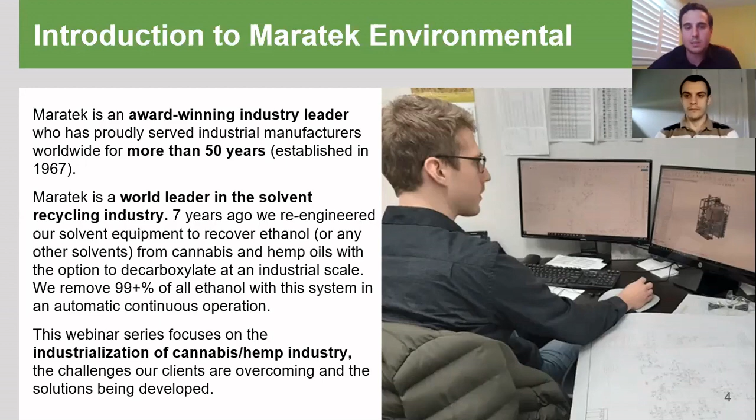And with our initial entry into this industry, it really was around solvent recycling and recovering the solvent out of the oil. And that really led to the development of our ORES series, where we didn't just recover the ethanol out of the oil, but we automated the 3 steps of bulk recovery, residual recovery, and decarboxylation all within one system. And we'll dive into that and some of our technologies a little bit later in this webinar.

So now to jump right into the webinar process. So on that, a high-level overview of the cannabis and hemp oil production process. Well, the first step is the inbound biomass. You've got to be thinking also about how that biomass is being received. Is it super sacks? Is it in barrels? Is it wet and it needs to now be dried? Is it already pre-ground? How are we going to be unloading it and bringing it into the plant? And that's really the main focus, the main entry point of the production process. From there, we get into extraction.

Now, on the extraction side, there's a few different types of solutions regarding the technologies that can be used, but the main two right now in the industry, we would say, would be ethanol extraction and CO2 extraction. There's also butane extraction, other hydrocarbon extraction, rosin presses, water-based extraction methods. But CO2 and ethanol are kind of the main two right now in the production process.

From there, we get into filtration, which is really two steps on the filtration side. The first step there being filtering out the plant material after the extraction step. But also, depending on the type of extraction method that you do, you might be carrying on a lot of fats, waxes, lipids within the oil. So you might need to do a whole filtration and possibly even winterization step to pull those out of the oil. From there, we get into the recovery stage and decarboxylation stage.

Now here, what we're talking about in the recovery and decarb stage is basically the three steps of bulk recovery, where initially a lot of people at smaller scale just use rotovaps, but as they scale, they look at other lab technologies like falling film evaporators for the bulk recovery stage. From there, possibly going into a rotovap or another system for the residual recovery for the little bits of ethanol that are left over after the falling film system. And then the decarboxylation step, which is activating the cannabinoids within the oil.

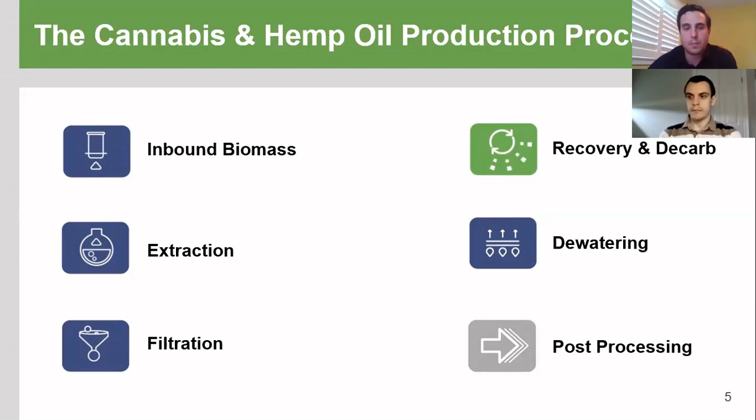And from there, we go into post-processing, where we would talk about doing distillate production, isolate production, or whatever other final process you'd like to do, depending on what your final product would be. So to start things off, the importance of automation and closed looping. So the question really is, why automate and why closed loop?

Next slide. And here what we've done is given you a general high-level overview of that extraction process. So here we're referring mostly to a cryoethanol extraction process. You have your biomass feed in. Then from there, you have your extraction step, either CO2 or ethanol. The winterization step's optional. When doing CO2, you end up carrying over a lot of those fats and waxes that I was referring to, where you would winterize to freeze them out.

Just like when you put, for example, your soup in a fridge overnight, and you collect that fat layer at the top. So to winterize your solution, you basically pull out the fats and waxes thereafter with the filtration step, whereas doing a cryoethanol extraction process, you could completely skip the winterization step, as you wouldn't be pulling all those other things out of the plant into your oil.

From there, then we'd go into your bulk recovery step, your residual recovery step, and decarboxylation. And this is where our Maratek Ores 3-in-1 solution really can take those three steps. So rather than using a falling film, then a rotovap and a decarb reactor, automating all those three steps within one solution to a heated oil storage.

And then you see there at the bottom, from a closed loop process, you would bring your ethanol back over to your cryo chillers first, and then feeding into your extractors in a closed loop process. And if you are carrying over water too, in that stage is where you'd close loop into what we consider our F series, or another system could be used as well to reproof your ethanol in line.

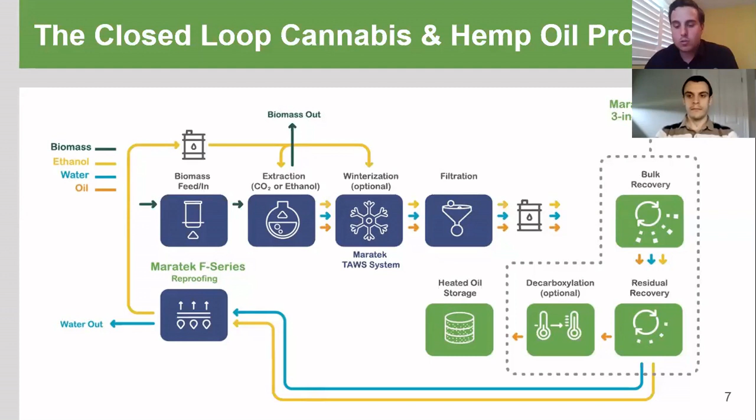Now, the big thing is, why automate? Why closed loop? Well, the cannabis and hemp industry come from a gray and black market. And back in those days, having a 10 or 20 liter rotovap would make you the biggest guy in the province or the state. But when scaling your operation, be it to just a few hundred pounds a day or a few thousand pounds a day, you really got to think about the efficiencies that are really going to come into play from closed looping and automating this process.

It'll also especially help with one area where we see a lot of losses among our clients, which is ethanol losses. When you're dealing with open containers of ethanol, two things: one, you have the ethanol evaporating continuously, but also two, ethanol is hygroscopic. So it's absorbing the moisture out of the air, and your ethanol grade is actually going to be decreasing just from having open containers. You're also going to have increased ethanol allowances.

A lot of issues that the industry is running into as they're looking to scale is increased regulations for having more solvents on site. One way to help avoid some of those things is by closed looping the process. That way you can have more ethanol on site and not necessarily have to deal with building full C1D1 environments. Also, reducing your environmental footprint. A big thing is, well, solvents are not the most environmentally friendly substances. So any chance you can to reduce that, we're a green industry after all. So that's a big step.

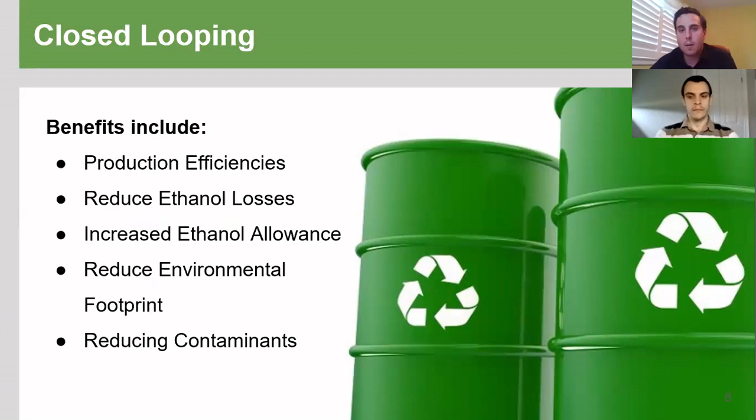But then it really comes into, on the next side, reducing contaminants. During these extraction processes, we're seeing a lot more of the industry pushing more and more towards GMP compliance, towards pharma, right? Whenever you have an operator dealing with the substance and carrying it around or anything of the sort, there's always an opportunity for operator error. So by automating and closed looping a process, you greatly see a reduction of those issues, and also of contaminations, just from even having your oil in an open container, you can get contaminants that way.

But you also see further benefits from reducing labor costs, because now instead of having a room full of falling film systems and rotovaps and different extraction units and so forth, by closed looping and automating that process, you streamline that efficient process, and you can take your existing team and scale and achieve a lot more production value using your existing labor. And it's really evolving the mindset from thinking about the production process as all these small individual systems into a single process, a single control system for an entire production process.

And then the other big advantage, for GMP and especially EU GMP, is all that batch tracking capability that's brought along with the whole automated step. So you can control every single step along the way, with controlled tracking for every different batch you do, be it time of day and everything like that. So if you ever had to deal with a recall or anything of the sort, it makes it very easy for your team to handle. And really, at the end of the day, it's not us pushing the industry that way. It's really our clients that are driving us to continue the developments on this side.

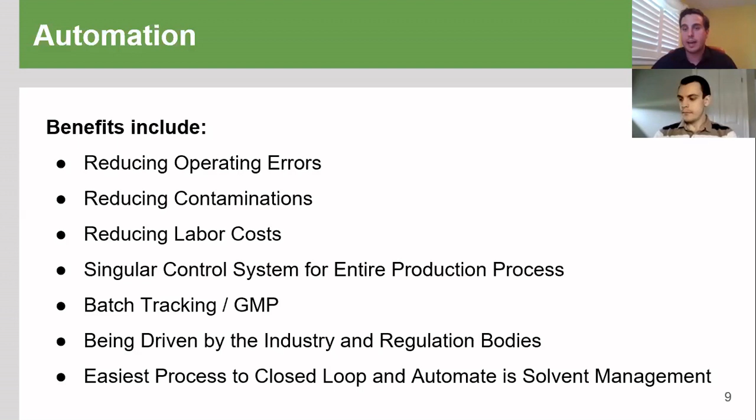And for those of you that are already running an existing operation and going, well, I've already got all these systems. What do I do now? How can I look to make my existing process more efficient, even though I'm running with all these individualized systems? The easiest first step to close loop and help automate your production process and achieve much more production of what you already have is regarding solvent management.

So next slide. So here on that side, just to recap back to the previous closed loop system that we were talking about, even if your biomass feed in, your extraction step, your winterization, your filtration step are all being manually done, you could already look at automating that whole recovery step at the end of the line there, your downstream technology of bulk recovery, residual, and decarbing into one system with our ORA solution, but also then close looping that right back to your cryoethanol storage to be rechilled and then refed directly back into your extractors.

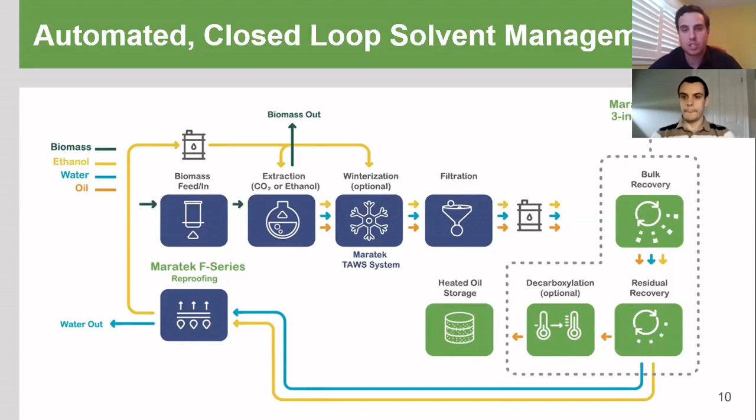So that's what we see as kind of the lowest hanging fruit for existing operations to jump to that next level from an automation and closed loop production standpoint. So now I'm going to be handing it off to my colleague, Lucas, who will be taking it on now regarding the implications of scaling, some more about the advantages as well as some of the challenges.

All right, great. Thanks, Kyle. So as you mentioned earlier, I'm a senior process and automation engineer at Maratek. And the four things I want to touch on today are major things you want to think about looking at scaling up your cannabis or hemp extraction project. So the first would be process design integration. So this would be the discipline where we lay out the equipment in your process, connect it together, and make it all work together as one continuous system.

The next is regulatory and jurisdictional issues. So dealing with ethanol and other hydrocarbons puts you in a hazardous chemical process, which calls in a lot of regulations and oversight that you have to make sure you're totally compliant with to operate. Then we go into a little bit of chemical engineering, which is dealing with the actual physical and science challenges of scaling up each step. And then finally, we get to financial risks, which ties into project management and some of the pitfalls that you can fall into trying to execute a larger engineering project.

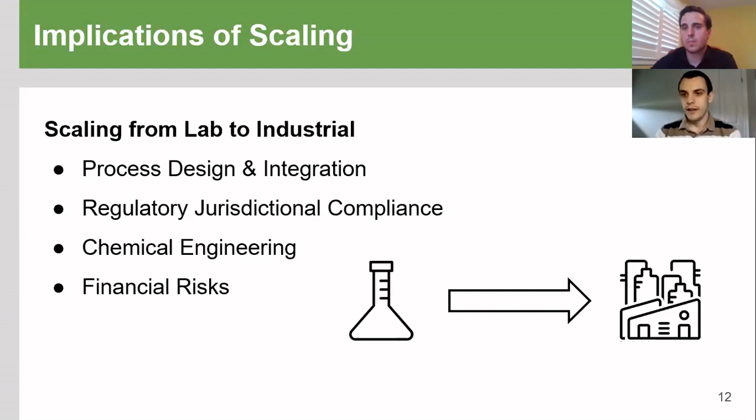So first, in process design and integration, at a small scale, you can think of each piece of equipment as its own discrete thing. You shop around for a rotovap, shop around for a freezer and glassware, and you can place it all in one room, and you don't necessarily have to worry too much about how they're going to work together, because most of the time at a very small scale, it's manual transfer by a worker between steps. It could be somebody literally carrying a glass beaker and putting it in a freezer.

But when you scale up, the material handling by personnel becomes completely unfeasible. Even at a couple 100 pounds a day of biomass in, you're going to need to design hard pipe connections between machines, which could be sanitary GMP connections. And that also brings in, you may need holding tanks or buffer tanks between machines, pumps, valves. Those tanks would need levels. And all of this, very quickly, would force a basic level of automation right off the bat.

So for example, if a buffer tank was getting too full, you'd have to have a central control computer or PLC slow down the machine feeding it, or speed up the machine draining it, or if the tank got too full, stop the process. And we can do all that. We could send a remote alarm to an operator on their phone if that happened. But basically, this level of automation you have to do in your integration also has safety benefits.

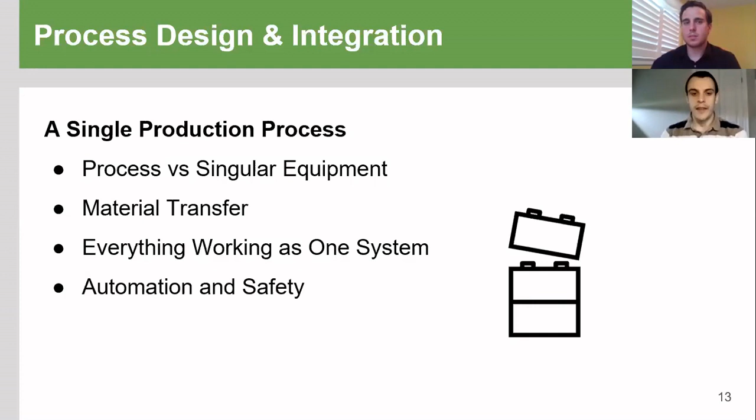You know, a redundant safety PLC would be able to respond to process upsets anywhere in the whole process and safely stop it or control it in a way that wouldn't cause a big problem.

So next, looking at regulatory and jurisdictional issues. So as I mentioned, when you're dealing with hazardous chemical processes, it brings in lots of things like area classification, fire codes, building codes, insurance, and basically your process affects the building you're in, but also it affects society around you at large.

A great example or analogy I use is a small lab might be like playing music on your phone in a public park. While you're not really allowed to play music, you're not really bothering anybody and you're not going to create a big disturbance, so you can get away with that. But scaling up to a large industrial facility would be like bringing in large amplified speakers and inviting hundreds of people. All of a sudden, now you need permits. Now you need to go to the local government. You might not be able to do it exactly where you want and when you want.

The point is, as you disrupt more people and become a bigger interest to society, there's a lot more oversight. Rightfully, I think, if you're dealing with ethanol and hydrocarbons, which, especially as we're boiling them, you could create explosive mixtures in the air with the vapor. So we have engineers in-house that have decades of experience executing hazardous chemical processes. So you can be confident that with the right partners, you can get through this process, but it definitely requires some professional engineering services.

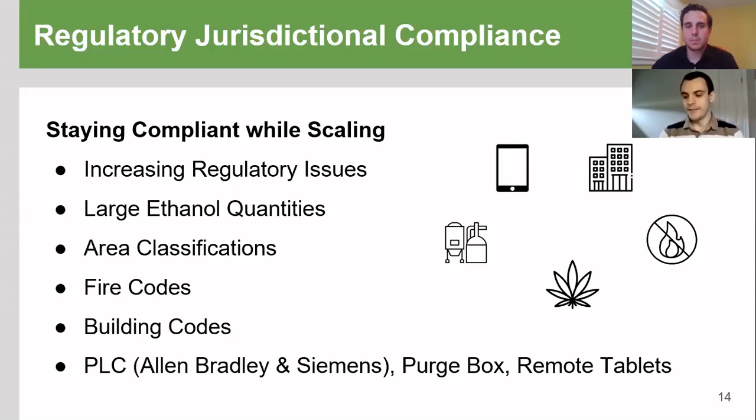And this is all known stuff. None of this is breaking new ground. There's hazardous processes everywhere. These can be executed safely, and you can pass your inspections first round if you know what you're doing. So then I wanted to move on to a little bit more of the chemical engineering challenges. So this gets more down to the science: besides the practical challenge of integrating a process and the regulatory challenge of getting it approved, there's basic physics you need to work with here.

So a perfect example, and this actually comes up a lot, would be the surface area and volume problem, or the square cube law. So we can use the example of a rotovap. You have a round bottom flask submerged in a warm bath, and you're relying on transferring the heat through the surface of the flask into the ethanol inside. So if you just took a rotovap and made it physically 10 times bigger and put 10 times the heating power, it might only be 2 to 3 times faster. That's just because as you make that sphere bigger, you have way more liquid and not that much more surface area. This is just a basic result of geometry.

So there's a lot of engineering and thought that goes into dealing with problems like this. For example, we could put coils inside that volume of liquid, add more surface area. We could recirculate it through heat exchangers quickly, just to create a lot better heat transfer situation. In engineering, there's a lot of solutions to these kinds of problems. And this is huge in solvent recovery, where obviously we need to transfer a lot of energy to the solvent to boil it off and get you your oil out of it.

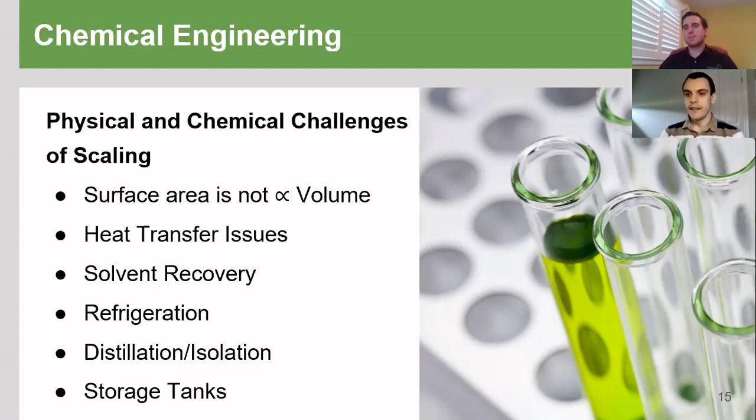This even goes to mixing tanks, where it's not even so simple taking a mixing tank and making it twice the size. There's chemical engineering textbooks written about how the different kinds of recirculating currents create different shear forces on the particles floating in it. So each step here, you need expertise to understand how things physically scale.

So then finally, I want to talk a little bit about financial risk. And really this section is all about project management and why it's so key to making these projects go off smoothly. So, you've heard the adage, spend $1 now to save 1,000 later, or, an ounce of prevention is worth a pound of cure. Doing careful engineering design upfront is so critical in this for a couple of reasons.

One is just that these large custom equipment can have very long lead times. And obviously the project has to move forward. Say it takes 24 weeks to get the biggest distillation machine that's ever been built, if you want to build a really huge flagship facility. Well, you have to move forward in your facility before that gets delivered. That means mechanical contractors have to be putting pipe mounts in and piping stuff in. You have to have electricians setting cable trays. You have to put refrigeration equipment in.

And so a lot of this challenge is a simple challenge, is picking up the phone. You have to have a project manager coordinating. While this equipment is still a 3D model on somebody's computer, the mechanical contractor needs to be putting the pipe connection for it to just be dropped in and connected. So really good management means when that equipment gets there, it can be connected right away.

And this goes to the idea that the cost of mistakes scales with the cost of your project. So on a huge project, if a small mistake is made with piping, now your equipment gets there. Now it's going to be a multi-week delay. You have to bring in welders, cut a bunch of piping up and change it, be very costly and bring a lot of delays in. So having one party, or one group, be kind of the prime contractor and managing all this, it can make a huge difference. Another thing to think about is utilities.

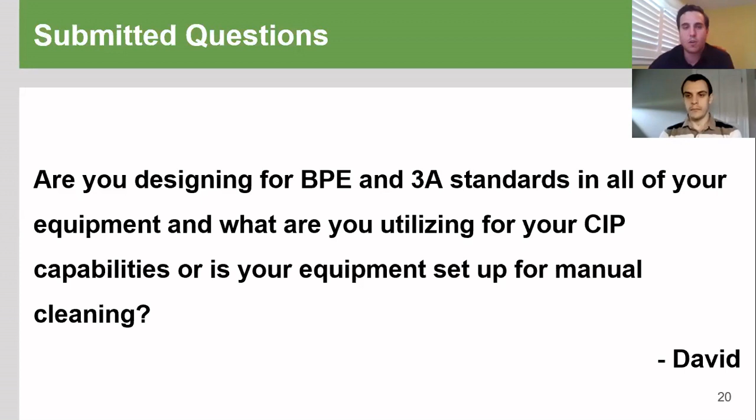And then on our OR side, on the SC series, it's much more of a manual clean. Whereas on the C series, it's very much a fully automated CIP process. And there we generally use an ethanol rinse. But for clients that want to use a variety of different cleaning agents before then, followed by an ethanol rinse, followed by a wash down, we can also accommodate those things as well from our CIP standpoint.

Which extraction method is easier on a micro scale, CO2 or ethanol? From Ryan. Well, Ryan, this is maybe a question that we should discuss a little bit more with you directly afterwards. It really comes to understanding, do you already have an existing facility? What is the zoning you already have allowed? Personally, my preference really is on the ethanol extraction side.

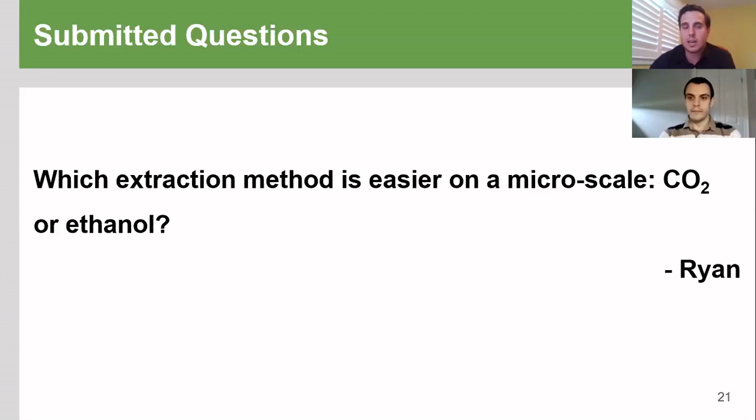But from a CO2 point of view, if you have an area where you're not necessarily going to be looking to build a classified zoning area, with CO2 you could greatly reduce the amount of ethanol that you need on site. So it really comes to understanding what you're looking to do, the end products you're looking to make and the facility you have right now. Then we can advise more easily on which way to go. But personally, if I'm able to deal with the zoning that comes from having more ethanol on site, my preference is to start right into a cryoethanol extraction process.

How to remove solids in order. Lucas, how about you take this one? Sure. I can walk you through basically when you have your plant material mixed with the ethanol; I'm going to talk about an ethanol process. We have a couple methods to do the bulk separation and filtering. When you have your plant material and ethanol all mixed together, at a large scale you could use decanting centrifuges, which is basically just spinning it really fast and squeezing out the ethanol from the plant material, or you use a screw press.

And then once you've done that, you can go on to filtering and then potentially winterization to get out all the fats and wax that are dissolved in there. Or if you're already cryo or cold enough, you could go directly to filtering, and any wax you do pull out won't dissolve properly. So that's how you basically remove the plant solids from your extract.

Oh, Kyle, I think you're muted. Sorry about that, I was muted.

What extraction process is best suited for large scale production, by John? Well, when people are looking to scale in this industry, especially if we're starting to get into thousands and thousands of pounds per day, we really see cryoethanol extraction as being the leading medium in regards to scaling your process. One of the big reasons for that is not needing to utilize the whole winterization process. By running at cryogenic temperatures, you can really skip a major production process.

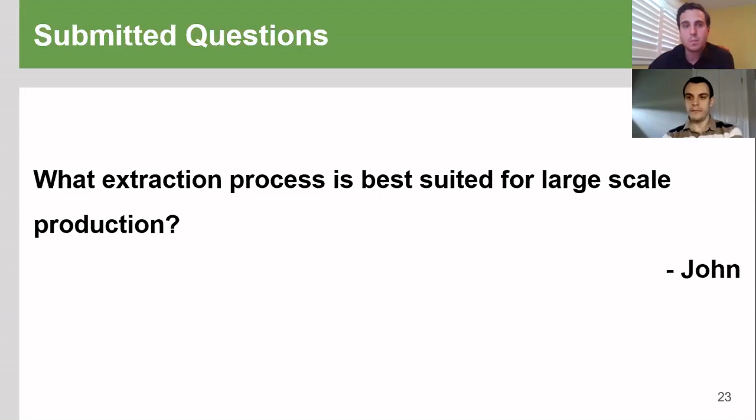All right, what are the cannabinoid separation process options, by Abdul? Lucas?

Sure, so if you want to go straight to separating out pure CBD, once you've got your crude oil with all the residual water and ethanol removed, you can go to post-processing. You go to distillation, get to distillate, and then that can be processed to CBD isolate, which can be 99.5% pure CBD powder. If you're interested in other minor cannabinoids or THC, we can take that distillate and do a process called chromatography. We can separate out the different constituents.

And if you're interested in terpenes, those can be separated off in the first stage of distillation. So we have science and technology partners that can help you go farther and farther downstream to more specific end products. And this is definitely something we could consult with and help you with this process.